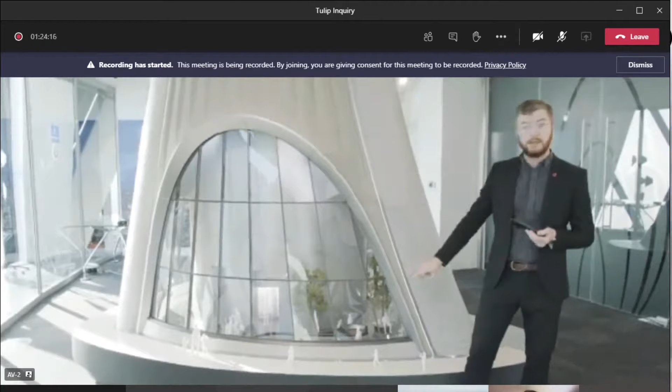We've expressed these pins all the way up the building and all the way up the fluting as well, as you can see in the troughs that go up the flutes. Looking at this side of the model, you can see that there is a different detail where we've integrated hostile vehicle mitigation into the glazing in order to reduce the amount of bollards that we've had to use on the plaza.

Looking onto the interior of the model again, you can see we have brushed aluminium panels. This is to make the space feel as light and bright as possible, reducing the presence of the core in the space. There is an open lift car, which you can see, and it has a multimedia show in it that will be able to be played while you go up and ascend the building.

These lifts are double-decker lifts, meaning that there are 2 lifts stacked on top of one another. So in the place of 4 lift shafts, we're able to fit 8 lifts to give us as compact a core as possible. We've got an edge trim on the building that clearly delineates the plaza from the building. And we've chosen 2 materials for the plaza itself, which is York stone and granite paving. To explore this further, we move to our next model, which is the 1 to 50 model.

So the model here has been cut close to the ground in order to give you a view of the whole site. Doing this lets you see the permeability of the buildings on the plaza. It shows the Gherkin in the center of the model. It shows the Tulip and the pavilion. To pick up the point about the paving materials, we are introducing a lot more York stone paving into the plaza. This is to make it feel like it's integrated and included in the city's urban realm.

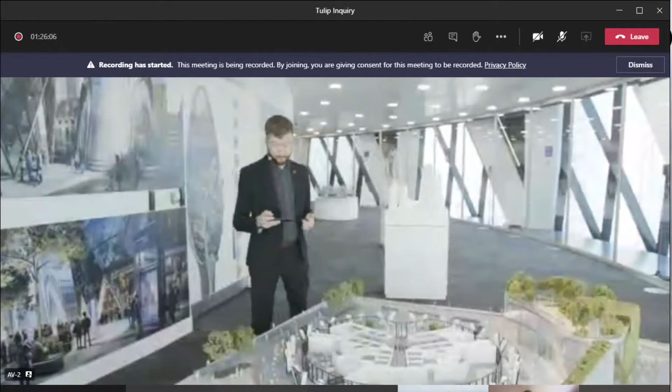The pocket park, which is located between the Tulip and the pavilion, integrates and diffuses between the York stone and the granite to act as a kind of buffer that mediates the relationship between them. There are concentric rings of granite benches which give a place to pause. The shape is not dissimilar to an amphitheatre. Vegetation and planting creates a softness that was not present in the plaza before. We've endeavoured to increase the vegetation across the whole site.

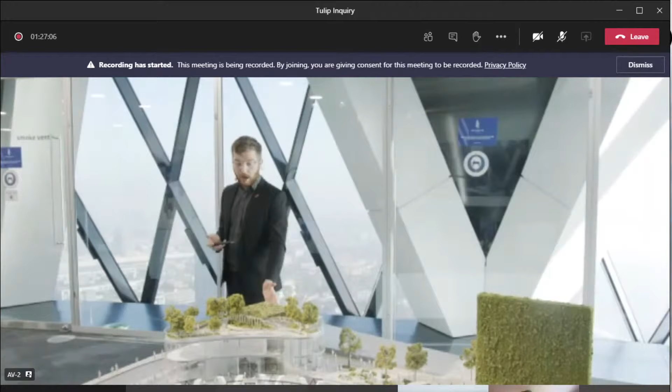We've introduced 2 lush new green walls at either end of Bury Court. The one by the Tulip conceals ductworks once housed in 20 Bury Street. The other one is on the side of the pavilion. The pair create a green gateway either side of Bury Court. This gateway at the St Mary Axe side reaches up and over and connects into the Rooftop Terrace, which is on top of the pavilion.

The Rooftop Terrace is connected to the rest of the public realm via a lift and stair. There are many raised plant beds, which are for shrubs, grasses, wildflowers and trees, along with lots of benches. On the first floor of the pavilion, there are offices, plant, and a mechanical automated cycle parking system, which is accessed off of Bury Court and the Pocket Park.

The ground floor of the pavilion houses new vehicle lifts, which allows us to get rid of the long service ramp that is currently on the site. On the ground floor of the pavilion is also the entrance to the visitor attraction and to the education and community space. The pavilion is connected via an underground basement mezzanine to the Tulip, where there are the banks of double-decker lifts which take people from the basement mezzanine up to the top of the building.

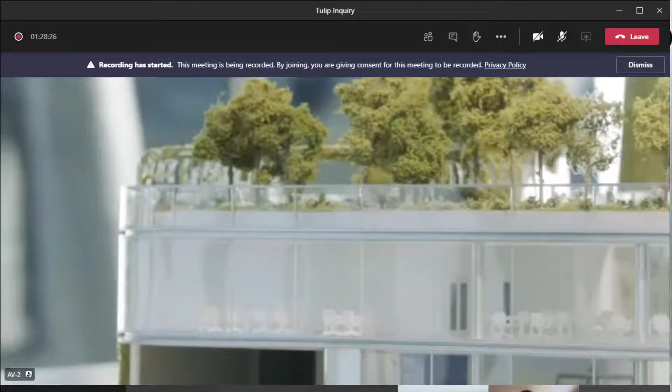I'd like to now move across to our next scale model, which explores the Tulip's relationship to the cluster slightly more. The model shows the consented schemes and the existing schemes. We have 100 Leadenhall, we have 1 Undershaft and 22 Bishopsgate. The relationship between the Tulip and the Gherkin is immediately apparent. They share a soft curvilinear form that communicates with one another.

At this scale, we get our first view of the whole of the building. You can see the flutes rising up the shaft, and you can see how the buttresses transition into the stem and become the frame that supports the windows at the top of the building. They also nest where the gondola tracks will be. There are 8 gondolas per frame and 24 in total. The top of the building is where the main accommodation of all the uses are. If we now move to our next model, we can explore the uses further.

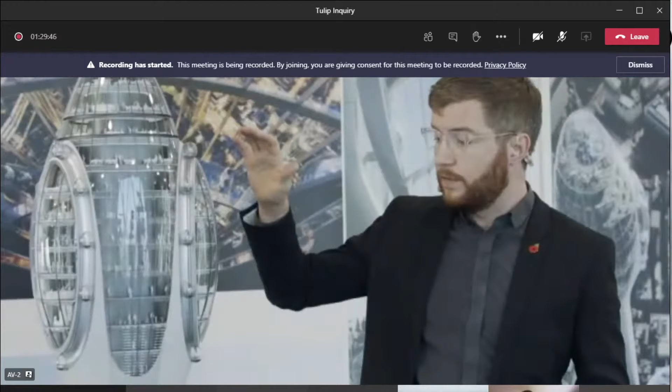This is the top of the building model. We've got a closer view at the different uses on all the floors, and we can see the form of the building articulated in a more detailed way. The top of the building is a domed structure where it's got the bar. It's similar to other domed structures that Foster and Partners have designed, such as the Reichstag and the dome at the Gherkin.

Level 10 is the building maintenance unit floor, where it contains the cleaning and maintenance equipment for the facade to ensure that it stays clean and well maintained. Also on level 10 is the kitchens that service the bars on the top levels and the restaurants as well.

On levels 8 to 9 are the restaurant levels. You can see there is a double height atrium that connects the 2 floors. And there's also, you get special spaces where the arches connect over the top of the windows.

Levels 4 to 7 are the main viewing galleries. They're connected by a quadruple height atrium with a sky bridge. This whole face looks down onto the top of the Gherkin, where there's a visual connection below. On the back of the building, we have slides and spiral staircases which connect the floors as well.

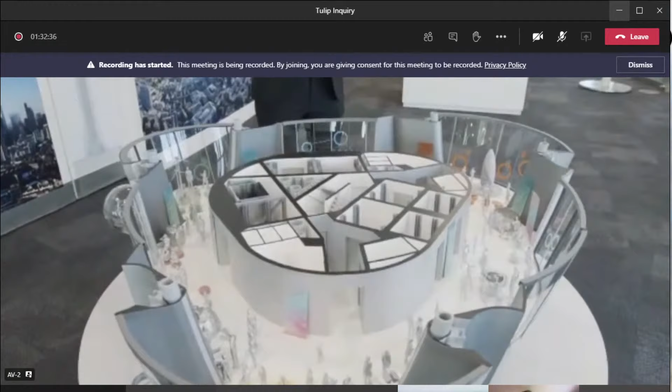Due to the scale of this model, you can get a better sense of the core. It runs through the building, servicing all the floors of the building. We have 3 banks of lifts, 2 banks of shuttle lifts, which take visitors to the top of the building. These are the double-decker ones that we previously mentioned, and 1 bank of local lifts, which allow for movement within the top of the building. There are fire stairs and fire lifts in the center as well.

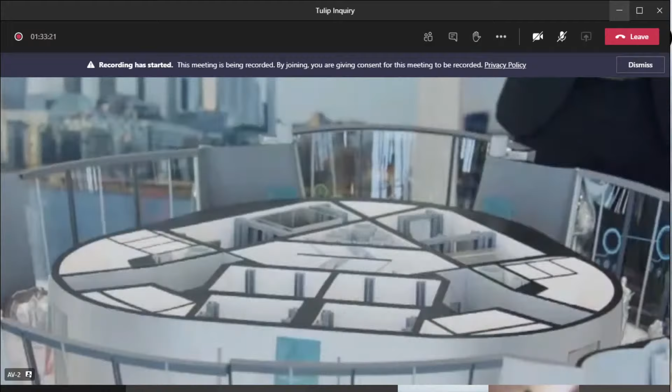We also get a slightly closer look at the gondolas. You can see how the mechanism and the structure is closely aligned and integrated. There are 2 hemispheres that make up a gondola. They are attached to a slew ring, which is gyroscopically stabilized and attached back to the track. We've explored the designs of these with an amusement ride maker, Intamin. There's space for 4 to 6 people to sit per cabin.

I'd like to give you a sense of the view that you'll be able to achieve at the top of the building, referring you back to this panoramic view taken from the site. In order to help you orientate yourself with our next model, I'd like to point out the Shard on this panorama and then draw your attention to the Shard on this model. This is a 1 to 1,500 model of a part of London. In the centre of the model, we have the eastern cluster showing existing and proposed schemes. You can see the Tulip here.

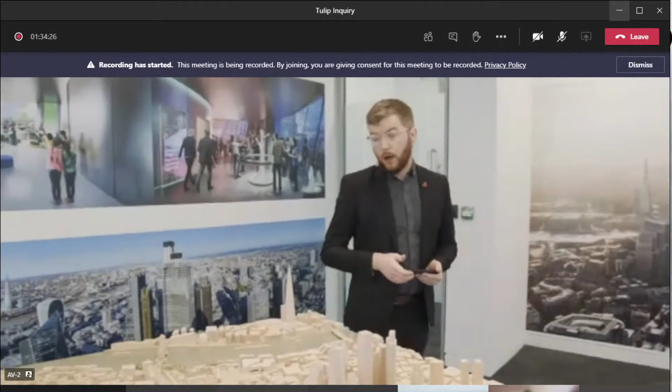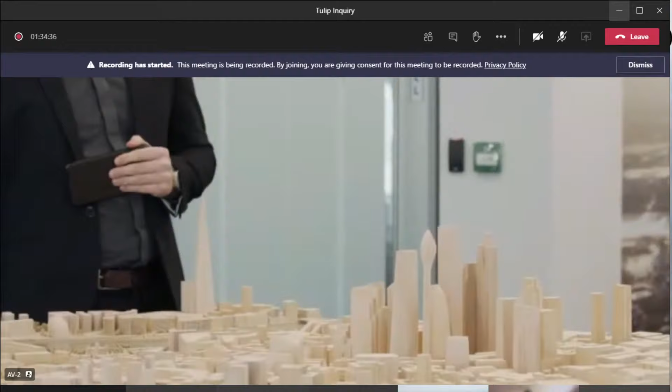Off to the east, we have the Tower of London, the World Heritage Site, and we have Tower Bridge on the Thames. Other key landmarks are City Hall, St. Katharine Docks, and the Royal Exchange. That concludes our tour of the models for now, and I'd like to now take the opportunity.

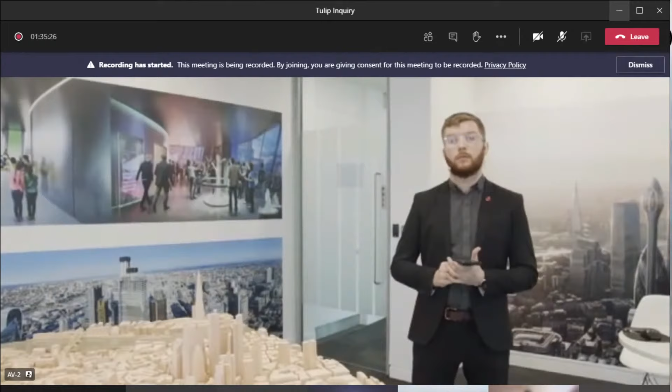Just before you do, Mr. Bush. Sure. So we had a little technical difficulty with one of the cameras there. Okay. And I'm going to ask that the relevant camera goes back in reverse order through the models so that you can get a 360 understanding of each of the models, going back from this wooden one right the way back to the first one. We don't need any commentary, I think, Mr. Bush. Right. Just if the inspector and the other advocates and the members of the public who are watching can look at the images and judge themselves.

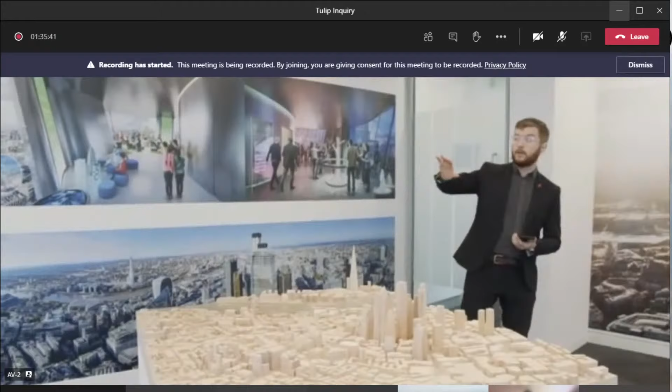Okay, I just need to tell the cameramen this, so they would like to have another look around the models again. If we could just slowly orbit around, going back from this one up the space, please. Do a 360. Can I just add, please? Can you hear me? Yes, I can, sir. Mr. Inspector. I didn't want to interrupt the presentation because I could see the flow of it. But yes, I very much want to see a slow move around this model.

And then I didn't catch as much of the education and gondolas model as I would like to have seen. So if that could be repeated slowly, please. We'll take as much time as you like on that. So as I say, there was a separate camera that was to do that job, and for one reason or another, it failed. So we're going to do this. So my instruction to Mr. Bush is that we should take as much time as is possible to go round these models. Thank you. Sure. Thank you.

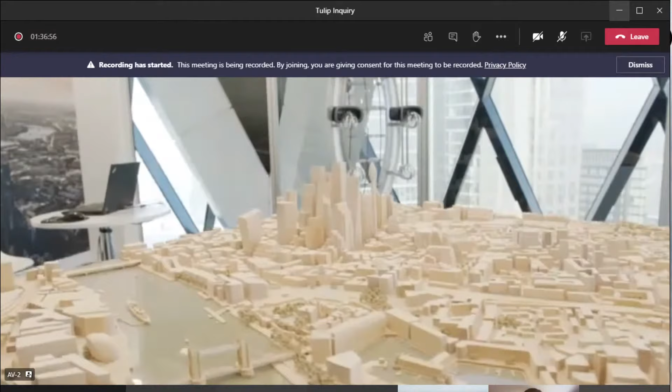Yeah. Can you just slow it down a bit, please, and just go very, very slowly round. Thank you. Morning, so it's Mr. Watson here of Taylor Wessing. I'm here with the crew and obviously with Mr. Bush. I suggest that when you and others have had the time to consider each model, then we'll move on. So we'll do it under your direction. Okay. Thank you. If you could stop there and then go slowly back round again the other way. Perhaps at a slightly lower level. Yeah, that's about perfect. Thank you.

That's great. Thank you. And so if you don't mind, I am going to ask that we go in the opposite direction, back round one more time. Yeah, no problem. Thank you. Right, towards me, guys. So can I ask through you, is that sufficient? And do any of the other advocates want any other views? That's fine for me. Thank you very much.

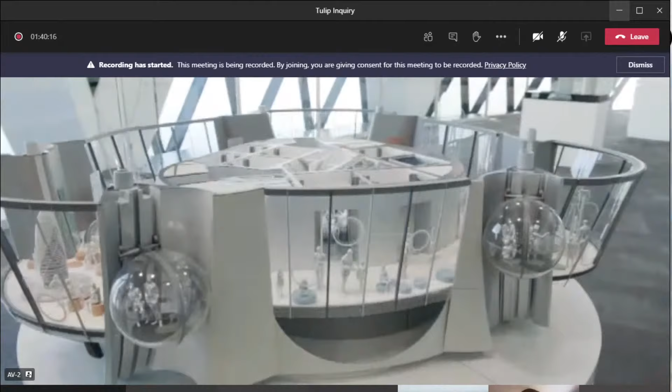So I'm not sure if you were able to see the gondolas when I was describing them, but we have here the two hemispheres of transparent material that are attached to the slew ring, which is a gyroscopically stabilized mechanism, and it attaches back to the structure of the building on a mechanical rail, which is not dissimilar to a roller coaster track. And we've got space for 6 to 8 people in these gondolas, with benches for people to sit during their ride as well.

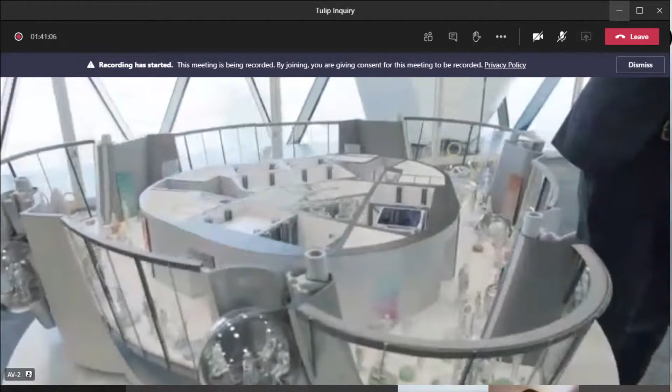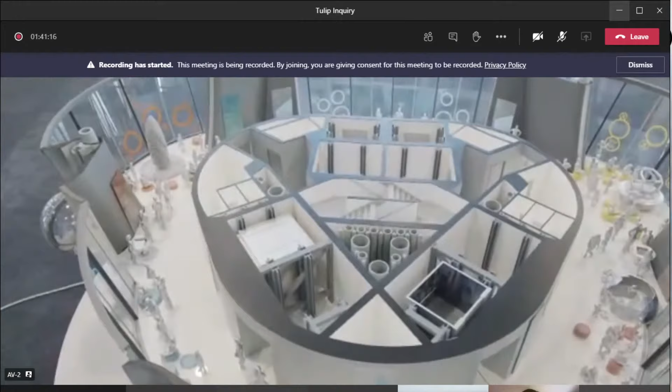Thank you. Can we then do the same? Sorry, sir. I was just going to say, with the camera focused on the model, could you just talk me through the core and the other spaces within that floor, please? Of course. So we have 2 banks of shuttle lifts. So these are the lifts which take visitors from the entrance in the pavilion, in the basement mezzanine, to this floor. These are the double-decker lifts here and here, 4 different carriages of them.

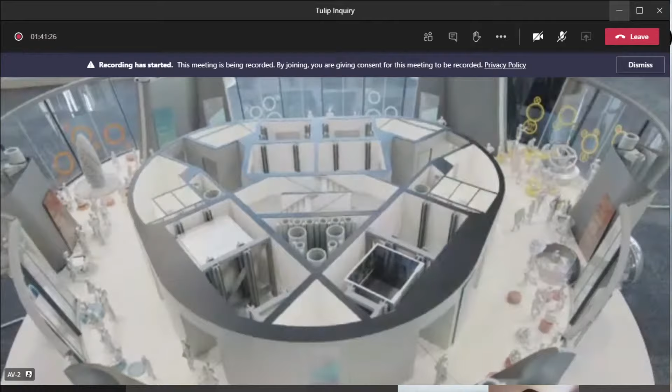Can you just explain the double-decker lifts to me? Are these simply joined together and they go up and down together? Yes, that's the case. Okay. So they load from the basement mezzanine and from the ground floor simultaneously, and then come up to the top of the building and unload from 2 floors simultaneously as well. And it ensures that we can get as many people up the building as possible. Yeah, I understand now. Thank you.

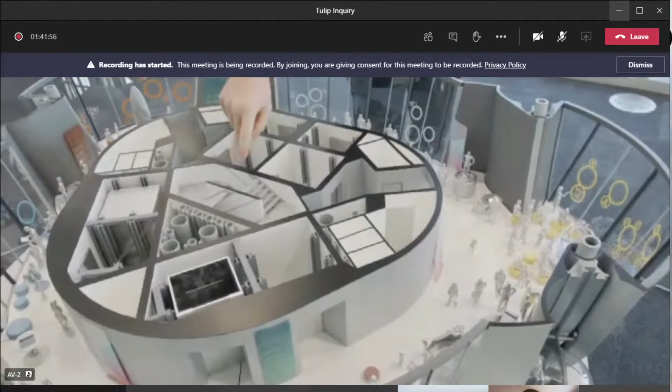Welcome. We've also got the fire stairs, which are a double scissor stair, which run the length of the building all the way down to ground to ensure that people can evacuate. We've also got the fire and goods lifts, which are dual purpose lifts, which are located here. And these banks here are the local lifts, which run just between levels 3 and 11 of the building. Right. We've got ductwork and the 2 toilets and disabled toilets in this core as well.

And then the layout that you're showing at the moment for the education and community facility, talk me through how that's arranged. So it's arranged in an open plan way that it's expected that people would circulate around, viewing each window at a time, and there would be curated exhibits and activities to do at each of the windows, which correspond to the views out and the national and London curriculum.

Thank you. And if this is for Mr. Harrison rather than yourself, then say so. But if it were divided into classrooms as shown on the latest drawing, quite how would the partitions go? I think that's a question for Mr. Harrison. That's fine. He's now got some warning of the question. Exactly. Okay.

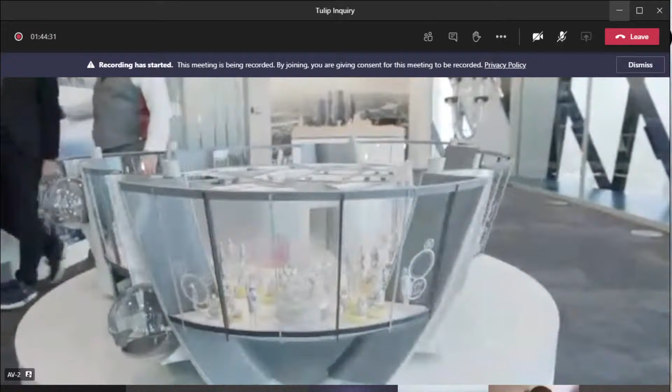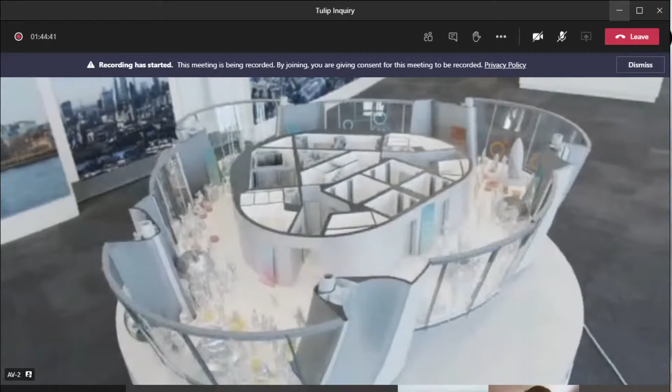Do you have any further questions of this model, Mr. Inspector? No, but if the camera could just do a 360 slowly round it, please. Mr. Bush, could it do a 360 at various levels, please, at the level of the gondolas and from above? Of course. So we've done one circuit there, and I'm going to suggest that we do another circuit from above, sir. Okay. Thank you. Right, that's from above then. Thank you.

Thank you. That's excellent. You content we move on? Yeah, I'm happy with that. Thank you. Next model, please. Next model then, going down. So the next model, if we go along, will be the 1 to 100 model of the top of the building that shows the different uses and the form of the building in slightly more detail.

Are there any questions specifically about this? I don't think so, but it's good to look at it again. Can you spend some time on this, because we didn't see much of this. We saw more of Mr. Bush last time because the second camera wasn't working. Thank you, Mr. Harris. Yes, we'll spend more time on this model from different angles, from the top to the mid to the bottom. We'll do that now.

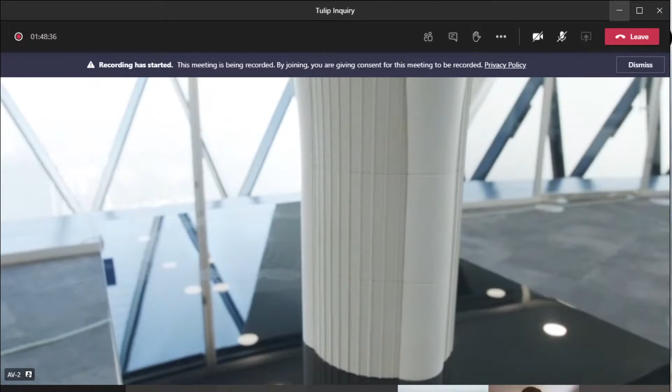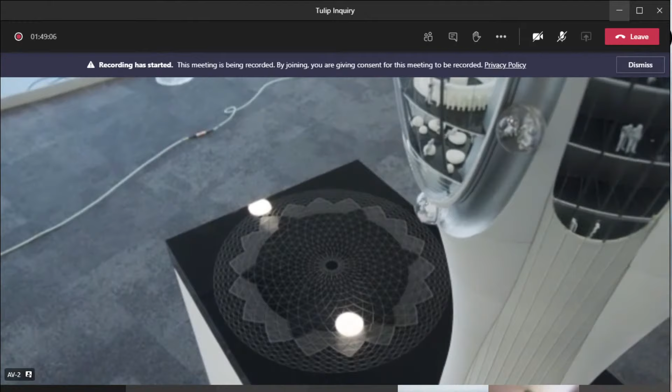Can we go down, please, and look at the stem, and the plinth of this model is interesting as well. Certainly. So we'll take it down towards the stem now, and then over to the plinth, which has the illustration of the top of the building of 30 St Mary Axe, the Gherkin. Can we go around that model one more time then, please? Certainly, we'll go around that model one more time. Thank you. There's the sky bridge on the wall in the background, sir. Ah, yes.

Yes, thank you. Just on that note, Mr. Harris, that sky bridge image is one of the 360 nodes that we'll turn to. If you would like to view the interior wall with the array of visual images, all of which are from Mr. Harrison's evidence, we can do the camera run on that as well. Well, I think we need to do that for the members of the public who won't otherwise see it. Certainly. I suggest then we'll do the model run to the end, and then we will track from the bottom up to show the visual array down the wall, and end at the top with the presentation from Mr. Bush of the 360 nodes. Thank you.

Again, sir, through you, can I ask, is that sufficient for this model? I've got a very clear understanding of that. Thank you. Grateful. Next model, please, then. Thank you, sir. Thank you, Mr. Harris. We'll move on to the next model then.

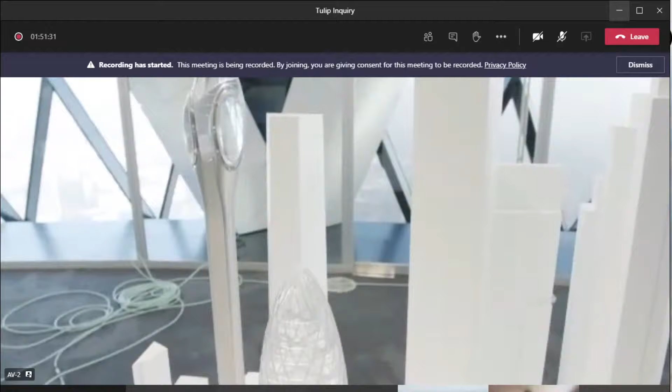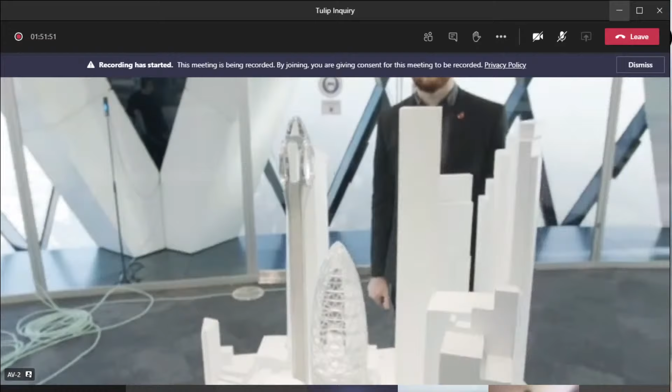Mr. Bush, just for orientation, would you just pick out the other buildings in that contextual model, please, whilst the camera's working the views? Of course. So in the center, we have the... Just pause a second, because we need to come out if we're going to identify the individual buildings. Okay. Just come back out and back out a little further. There we are. All right.

So we have the consented 100 Leadenhall scheme on this side. This is number 1 Undershaft. Yes, 1 Undershaft, Eric Parry. We've got the Cheesegrater by Rogers Stirk Harbour and Partners. And we've got 22 Bishopsgate by PLP Architecture. We've got 100 Bishopsgate by Allies and Morrison. And we've got Heron Tower by KPF.

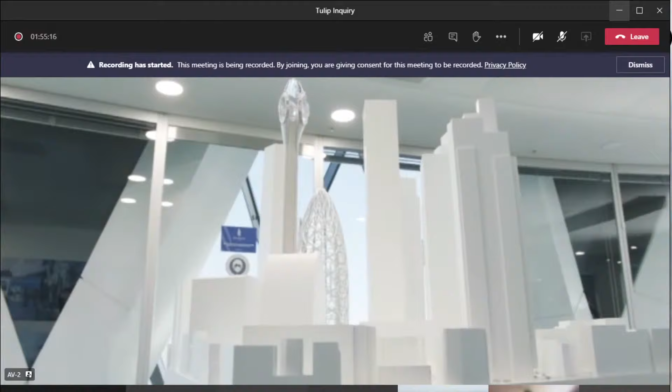Have we seen enough of this model, or shall we move on to our 1 to 50 model of the plaza? That's very helpful, but I wonder, could we do one more circuit, please, at a low level? At low level, so one more circuit, yes. Thank you. Sort of looking up towards the, I don't know how low the camera person can get. Well, we're going to give it a go, sir. We're dropping the steady cam now. We're looking up through the buildings. Thank you. That's great. Thank you, sir.

We'll now move to the 1 to 50 model that shows the public realm and the buildings cut at low level. And again, it would be helpful here if we had the 360 from above, and then also from low. Understood. And Mr. Bush, you were telling me about the way that the building would be integrated to the ground, and I'm not sure I absolutely followed every nuance of that. Could you just run me through it again, please? Of course. I feel like it might be better explained on the larger model at 1 to 10. Oh, okay. Well, we'll wait till that one. Thank you.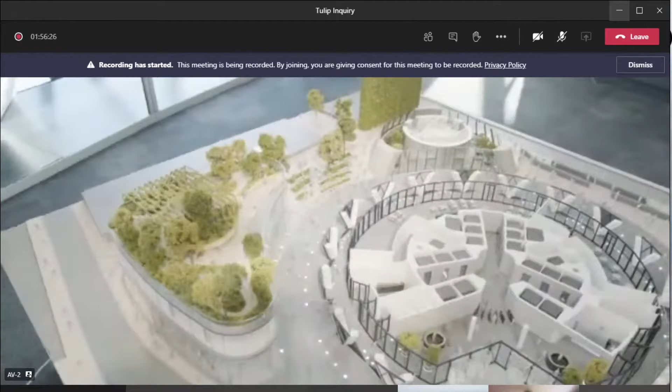Mr. Bush, the roof, the public realm on the top of the building that's the pavilion is removable, isn't it? It is, Mr. Harris, yes. Would you like me to remove it? It helps with seeing the permeability through the building.

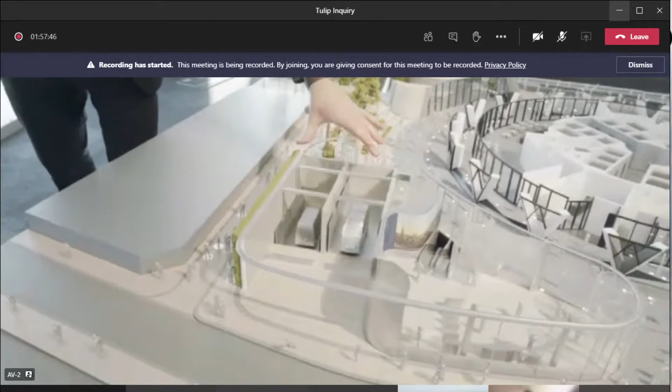And for the inspector, could you identify approximately the position of the present ramp, please? Of course, Mr. Harris. So they are both aligned pretty much with the vehicle lifts which we're showing here. So there is a ramped corridor which runs pretty much to this line here. So it's all of this space up to St. Mary Axe. Thank you. I remember that. Grateful, sir. Could you focus in on the pocket park as well for me a little, please? Thank you.

Should we do one more rotation of this model and then move on to the 1 to 10? Please, can we focus in on just the base of the tulip for a moment. Of course. Thank you.

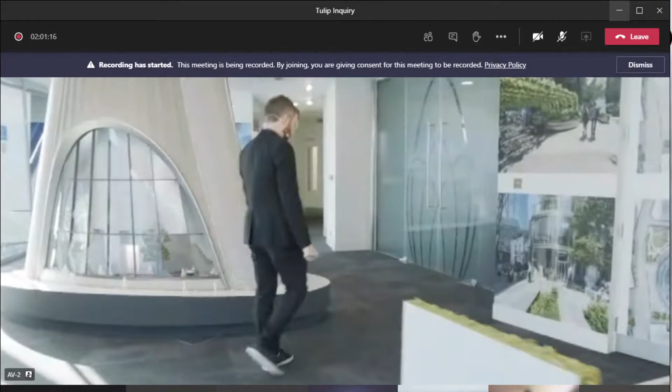And Mr. Bush, when you were explaining the nature of the pins and the flutes, we need to do that again, but with the close-up camera, because the pins and the detail weren't as apparent as they should have been last time. Of course. So the buttress is this large sweeping element here, and you can see that there are joint lines at 4.5 meter intervals, and this is the section that they'll be making each lift of the concrete in. The concrete formwork is going to be held together by bolts that tie both plates together, and you can see that we've articulated these and they're all aligned up the building as an honest expression of how the building comes together.

They're also present on the stem, which is where the fluting occurs, and you've got the bolt holes in the troughs of every other flute running up the building. And those would all be prefabricated off-site and brought along, is that right? The buttresses are in situ concrete. Oh, okay. And the stem, sorry, at this level would be prefabricated, but the main mast is all in situ. Right.

Mr. Bush, can you orientate the inspector in the sense of explaining where we are in terms of the relationship to the Gherkin and to Bury Street and to St Mary Axe, please? Of course. So this is the inner face here on the concave face. This is where we are adjacent to the Gherkin. So the Gherkin's mostly off the model, with the Gherkin being positioned further away.

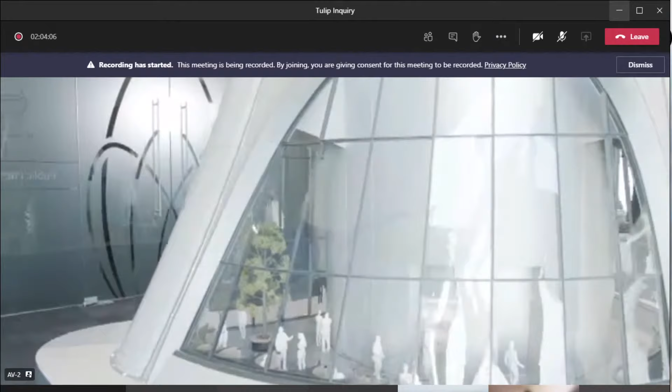Thank you. Can we go to the concave? Yes, I'm just going to walk you around the reverse direction. So here we have the concave face. So this would be the new, just pause there, the new curved street created within the site. And I'm looking out through and seeing a tree, and I'm looking out into Bury Street there. Is that right? That is correct. You're looking out through to Bury Street. Good. All right. So that will feature in this afternoon's evidence, so I wanted you to have that view here. Thank you for that.

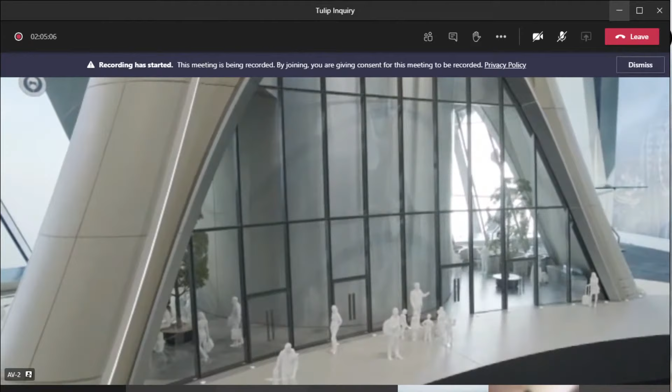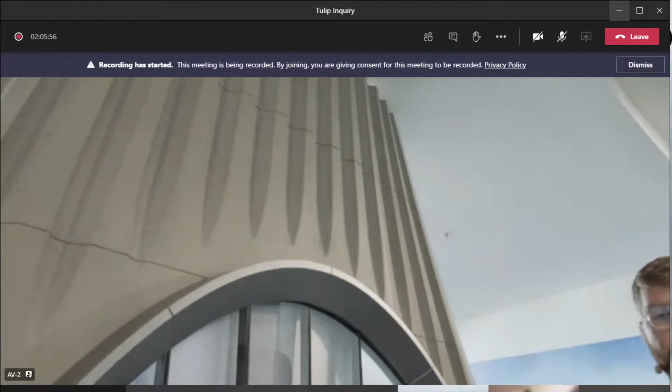Can we pan up, please? Could you do me a favour, please, Mr. Bush? Could you put your hand into the frame? It's a 3D thing, and could you run your hand over the flutes, just so the inspector can get a feel for the nature, extent, and depth? The flutes are here and they're scalloped to articulate the surface. They serve a function towards the top of the building to help shed wind, to stop oscillation and reduce loading. They're similar in form to those found on classical columns. And again, we'll hear about that this afternoon.

Good, so are you content with that? I am, yeah. I've got a very clear picture of that now. Thank you. I'm grateful. So two things. The first thing is, because of the inherent instability in Teams and the number of people who are on, the quality of the images that you're seeing is not as sharp as the quality of the images we are producing. So the entire thing has been recorded, and we've recorded it here too, exactly as is, and we can make that video recording at the much higher resolution available to you, and indeed to anybody else who wants to see it. Thank you. I was going to ask for that anyway, because I think it should be available for the Secretary of State. Perfect, sir. We'll make it available on a stick, so that it could be sent off with your report and the other documentation that the Secretary of State might need.

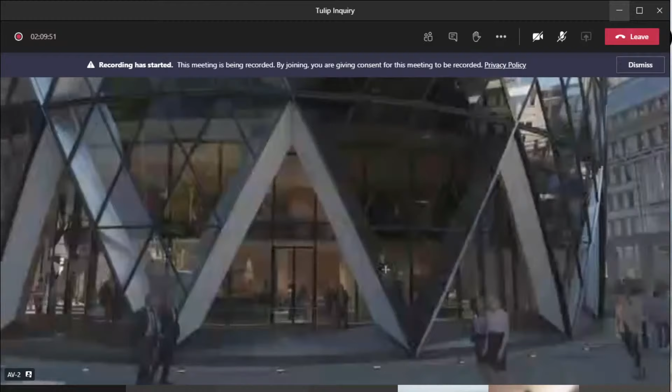Right. Let's see if this bit of the technology works. Great. Okay, I'm now sitting at my laptop. Are you able to see my screen, Mr. Inspector? Yes, I am. Great. Okay, so you join me here at the Pocket Park.

So this is a 360 node. So we can look in all 360 degrees of vision. So we can look up and see how the Tulip sits in relationship to its neighbours and the Gherkin. And you can see it next to Bevis Marks, 6 to 8 Bevis Marks next door to it.

We've got the newly designed Pocket Park with its concentric granite and York stone paving. And we've got the rehoused memorial to the victims of the IRA bomb set in with a water feature. We've got views opened to 30 St Mary Axe, the Baltic Exchange building.

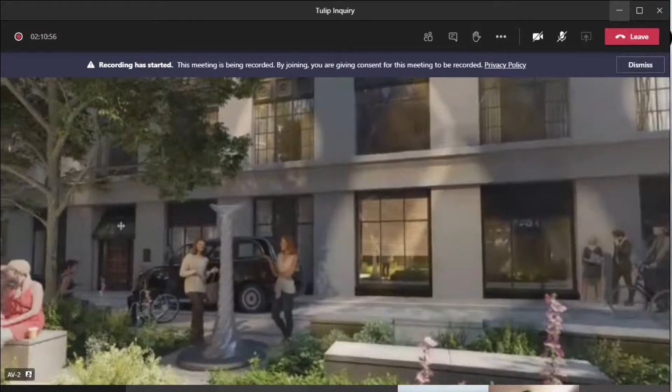As I pan round, the pavilion comes into view, and you're able to see the access routes up to the pavilion rooftop. So we have the stairs and we've got a publicly available lift. There's also the 3 cycle parking loading stations located in this location as well.

Is there anything else you would like to look at specifically at this level before I move on to the roof terrace? I'm quite happy for you to move on. I have looked at them and I'll look at them again, but I agree it would be helpful for the public who are watching in. Sure. I will move now to the roof terrace.

So this is the roof terrace on top of the pavilion level. Here is the pergola that I mentioned previously, which connects via the green wall to the roof terrace, which creates a sense of enclosure and allows for trailing and climbing plants. We've got our raised plant beds, which have shrubs, grasses and wildflowers, and a various array of benches. There's new perspectives on the surrounding buildings that you're able to see and appreciate from this elevated viewpoint.

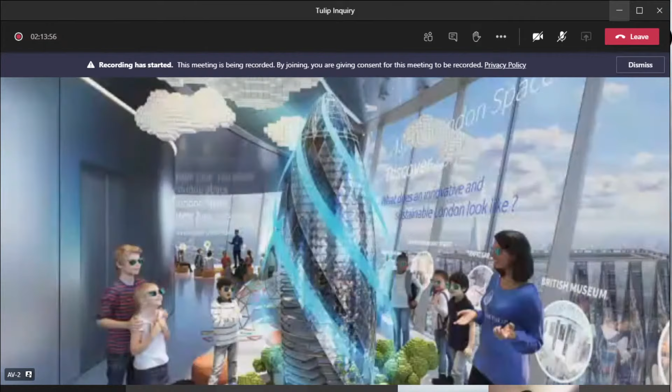We now go up via the lift. This is level 3 of the Tulip. We're in the educational and community space activity zone. This is in the education mode. There's a model of the Gherkin, and there's a sustainable lesson plan in full flow. We can see Eric Parry's One Undershaft from the view.

22 Bishopsgate. Sorry, sir, can I just ask if all of the consented schemes have been added into this image? I believe so. We have 100 Leadenhall over here. There may be some more recent ones that have been granted in the last month or two that may not have been present in this image, but we've endeavoured to include all the consented ones at the time this image was made.

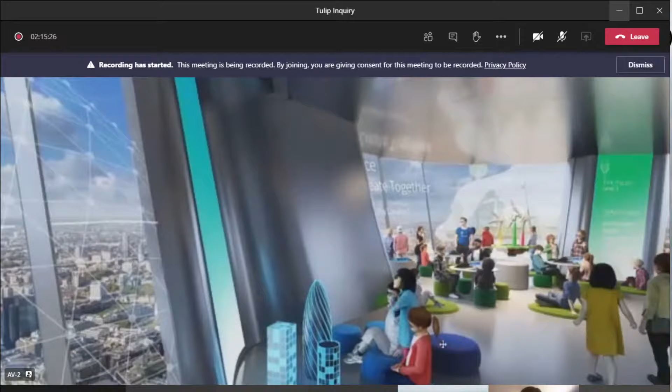If my learned friend has one in mind, offline, let us know and we can confirm or not. Yes, we do. I just want to check the height of 100 Leadenhall. Thank you. We'll check on that. Yeah.

I'm now going to move into the next 360 node. This shows the community mode of level 3 and a nighttime event. Do you just want to explain what those panels are that we see in the image there, please? Of course, this is the glazed facade of the building, which has interactive displays and technologies embedded within it, which will allow for an enhanced and augmented view out here. So this, I think, has been set up as if it is a community outreach session where they are teaching communities about scripting and coding.

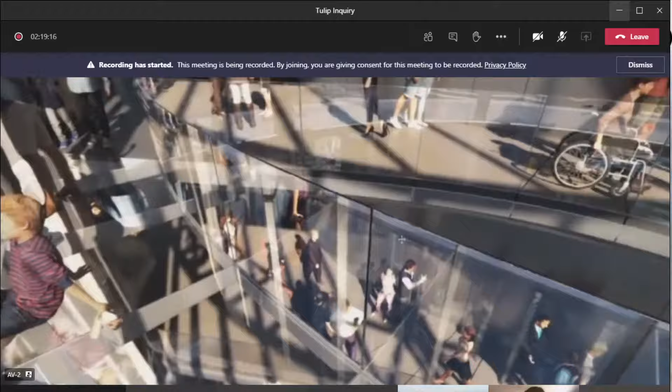And for Mr. Linus, could you please pan back round to 100 Leadenhall Street? Of course. There we are. Thank you.

Now we're going to take a VR node, a 360 node from inside one of the gondolas. So here we are now outside of the main envelope of the building. In the gondola pod.

Can we just for my sake pan back to what's now called Tower 42, Seifert Tower? Of course. And there we are. And so you can see, as I said in my opening, that context was everything in those days. That is just an extruded form of the NatWest logo.

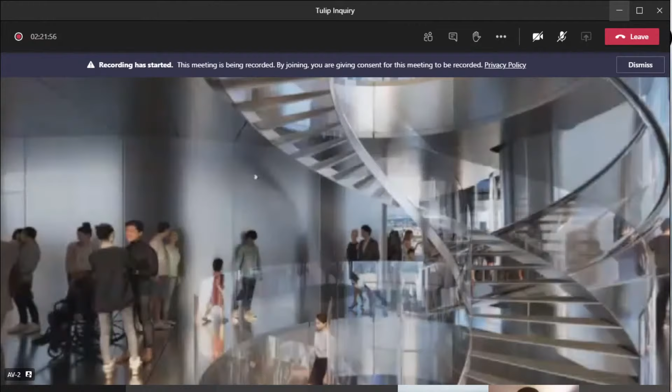Our next view will take us to the spiral stair and slide at the rear of the floor plate, connecting the 4 levels. From this part of the building, we're looking more easterly. You can see Stratford with the Olympic Park and Canary Wharf.

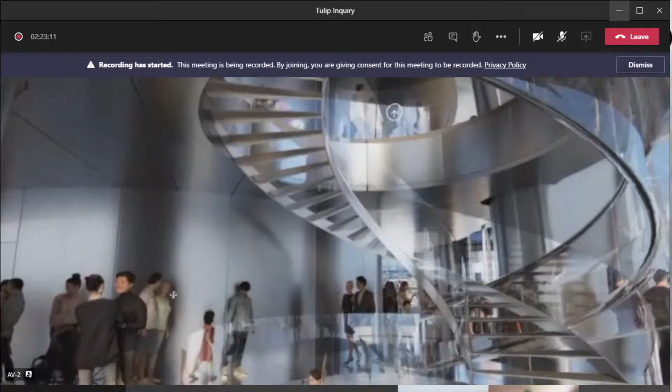We also have a view of the Tower of London and Tower Bridge, with City Hall in the background. Taking the stairs up to level 7, we're now on one of the balconies in the atrium, where, because the floor plates are scooped back, you can see down to a great degree.

That is the sky bridge there below us, with the Gherkin as well.

Our next node is in the skybar on level 11. We're positioned in front of the feature stair, which will take visitors up to the tallest, highest level within the dome space.

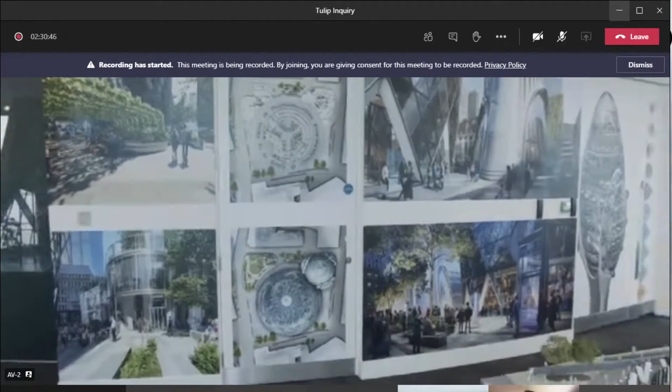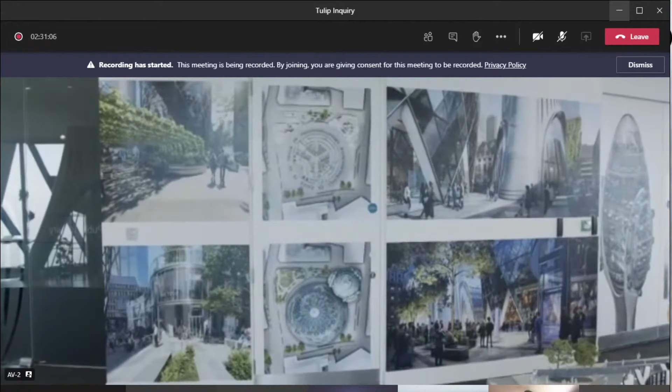That concludes the visual material that's presented on the walls. Thank you very much, sir. And that is the end of the session, as well as we could present it. So we are able to set up similar sessions later in the inquiry should you need refreshing on anything. But we'd need a little notice in order to get the cameras sorted, etc.

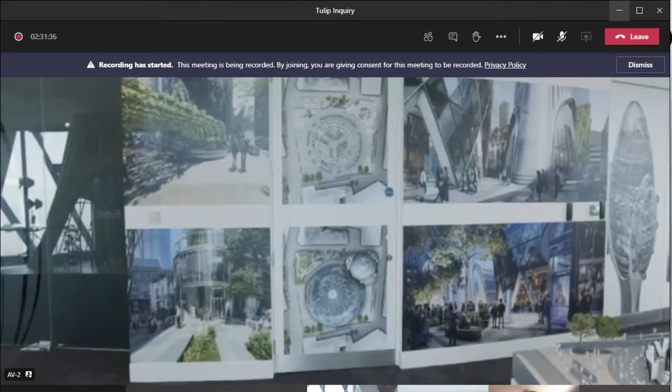So if you do think there's anything you need to see further during the course of the inquiry, please do let us know. I shall do that. If it's possible to have the recordings and the clips of the recordings available before we break in week 3, then that would allow me to double check that they cover everything that I think should be covered. So that would be helpful, please. We'll do that. And there are 2 other things that are relevant to this session.

The first is you have had the opportunity of the goggles and the immersive experience that goes with that, and you'll be able to note and judge the difference between that and seeing it on a video. Both my learned friends quite rightly asked that they be provided with the goggles too, and they were. We take the view that the nature and extent of that experience is such that the Secretary of State and his officials should be furnished with this information, but also with the goggles.

And yes, we'd be minded to do that unless you thought it inappropriate. But we don't see how it can be in all of the circumstances. So I don't have a problem, but I'll wait to hear from the other parties. But I'm quite content to, I wasn't planning to keep the goggles. I'm quite content to pass them on to the Secretary of State and his team to use.

I'm grateful, sir. And the second thing is we are with the other parties putting together, as you've asked us, the route for the site visit. And mostly, of course, it's uncontroversial and will be outdoors. But there is also the potential for you to visit the Gherkin, obviously, to come and see the models, but also to see the rooftop bar and restaurant here. And we would like you to do that if it is at all safe to do that, unless you tell us you've been there and you don't need to do that.

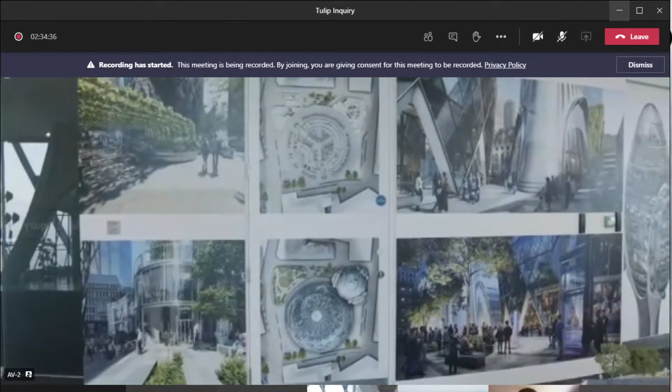Mr. Linus? Yes, sir. Sorry, just to confirm, in case we need to pick this up later with Mr. Harris's team, just checking on the figures, as we understand it, the height of level 3 is 255 AOD. And we just want to double check, there may not be an issue at all, how that relates to the height of 100 Leadenhall that's shown in one of those images. I think I gave a figure of 240 for level 3. It's a bit higher than that. It's 255. But we'll check that offline. If there's anything further to say, we'll come back to you, sir.

Okay, but while we're here, could we just pop back to that image, please? It was the first of the images, I think, from level 3, looking towards 100 Leadenhall Street. So if we can refresh our recollection of what that shows, and then the rest of this discussion can be dealt with in the usual way in cross-examination. Thank you, sir. Mr. Bush is now back at his laptop, so if we haven't already, the AV crew will make the switch onto the laptop. Yes, at least I see that. Okay. It's there.

Okay. And so we'll pass a note to HE in relation to that, and from the animators to confirm the position. Yes, sir. It's just a double check point, sir. Thank you. I understand. The interesting thing about all of these heights is that they're all taken from the tarmac at Heathrow Airport for some reason, and City Airport for some reason. But perhaps we can explain that in Mr. Harrison's evidence.

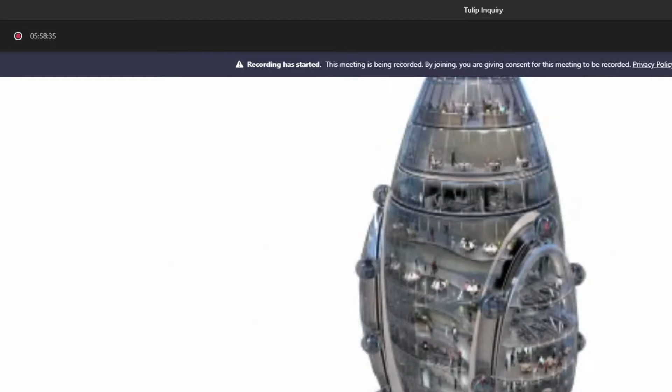The panoramic scenery at all levels is unrivaled, and with 410 linear meters of perimeter, every visitor will be able to stand and admire the view without having to wait or peer over someone else's shoulder. The sky bridge at the arrival floor of level 6 is a key part of the visitor journey.

A transparent walkway spanning across the 4-story void of the atrium, the experience places guests on the very edge of the building's facade, 255 meters above the streets below.

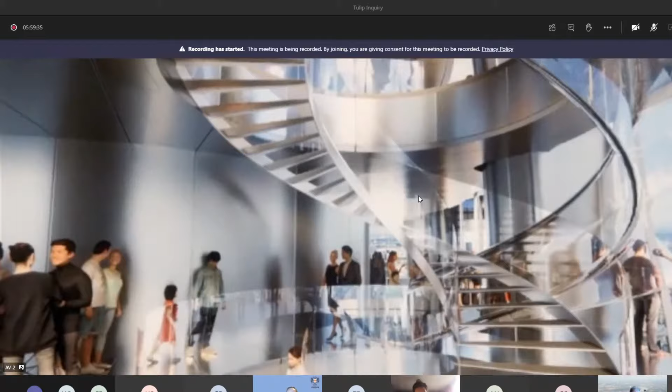The spiral stair with its reciprocal slide lets visitors move between the 4 floors. The transparent slide adds an extra level of enjoyment to the gallery. It is designed to be a more playful part of the experience for children and adults alike.

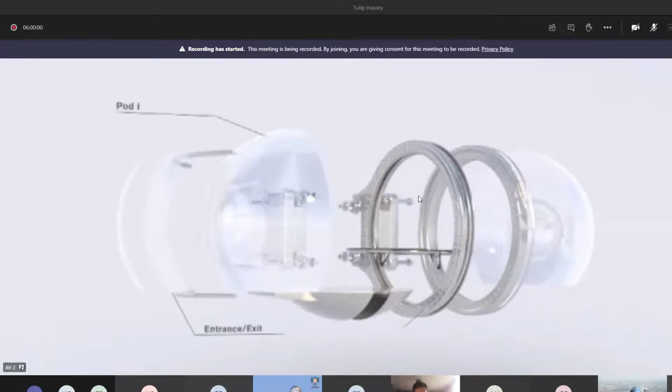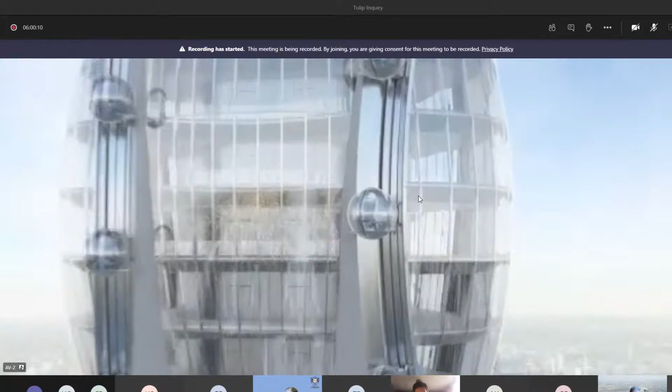The gondolas are without doubt the most spectacular feature of the whole of the Tulip. They give visitors a truly unique opportunity, an out-of-building experience, something they will never have been on before. A slow-motion roller coaster in a spherical glass cabin connected to the exterior of the building. The journey around each loop takes approximately 7 minutes, allowing time to appreciate the extraordinary scenery.

The curated visitor experience will be far more than just a view from an elevated platform. With its very particular location just back from the Thames, and with views to 3 prominent bends in the river, the unique form of the building takes complete advantage of more than 2,000 years of history, which will be brought to life through the use of innovative technology.

The education and community space is located on level 3. With an area the size of 6.5 secondary school classrooms, it sits 240 meters above the ground and has 360-degree views all around the floor plate, giving school children and local community groups a new social hub for learning, business, and the arts, supported by technology.

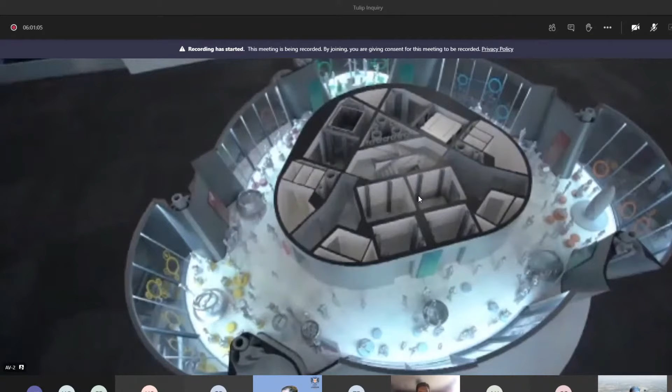The facility is a multifunctional space designed to be flexible and responsive to the varying needs of different year groups and uses by the community during the course of the day. It will open a window onto London's rich history and culture, and an opportunity to observe the innovations being developed for its future. The Tulip's educational outreach team will work with each school beforehand to prepare them for their visit, and also afterwards in order to develop continuity with the topics they have learned.

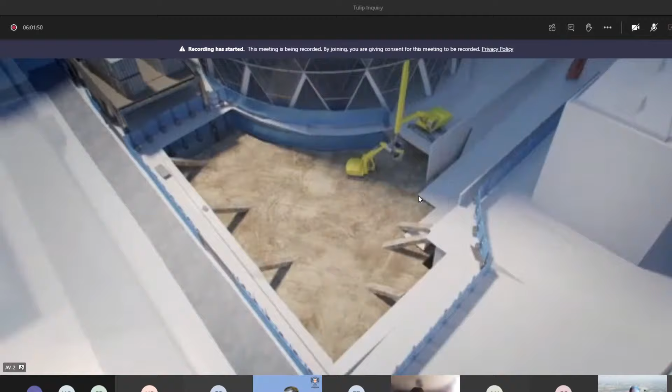We anticipate the building, if granted, would take up to 5 years to construct, and I would like to take you through that process now. After 20 Bury Street has been demolished, the site is cleared and excavated. Then piling rigs come in to drill a series of 55-metre deep boreholes for the primary foundation of the building.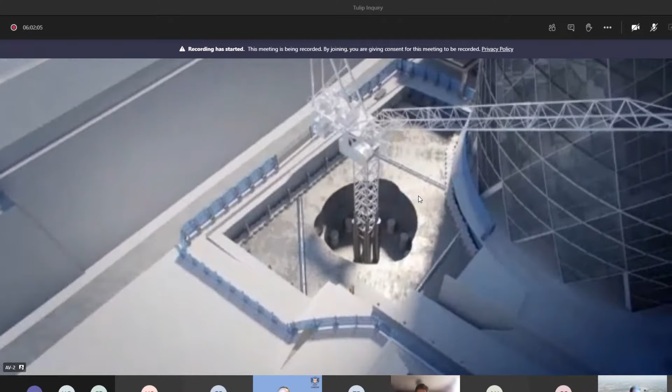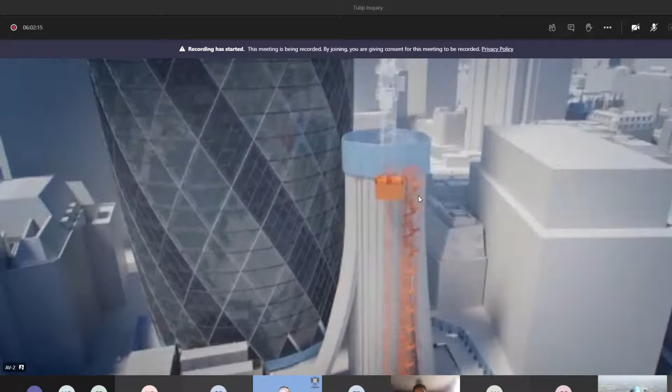Once the concrete pile cap has been cast and the basements completed, the jump form system for the core starts to rise. Stage by stage, on an approximately 5-day cycle, the stem rises into the air. Once it nears the top, the staging area for the top of building construction fans out, and from here on up, it is only the central portion of the core that continues.

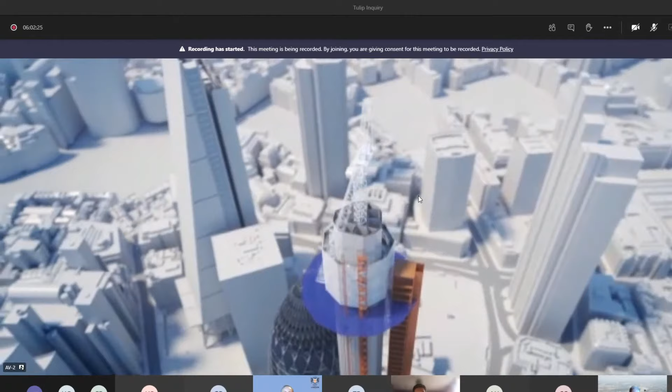The arches that support the exterior of the accommodation are constructed along with the perimeter beams. The floor framing spans between them and the core walls. Gantry cranes attached to the edge of the building allow the upper floors to be constructed. The mullion system for the glazing continues several floors below the top deck construction.

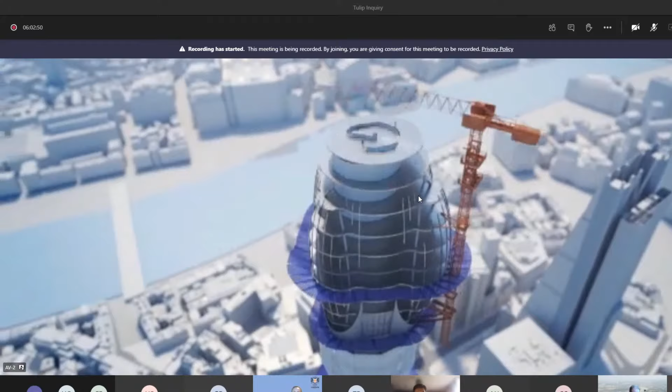Once the last floor has been built, a smaller spider crane is brought in to dismantle the 2 perimeter ones. The glass panels are installed, including the dome over the very top. Next, each of the spherical gondola cabins is hoisted into position and installed on the track mechanism concealed within the stainless steel loop, completing the external enclosure.

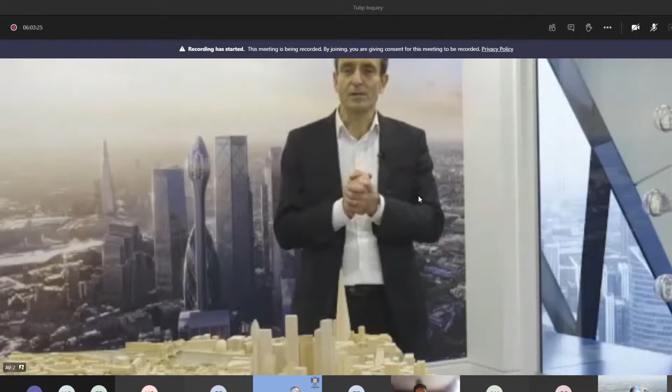In conclusion, Mr. Inspector, this is the most important building that Foster and Partners have done in years. It combines a sense of ambition with a spirit of innovation and technical achievement. It is a striking and, I believe, beautiful piece of architecture that provides a companion to a much-loved building on a windfall corner of the site.

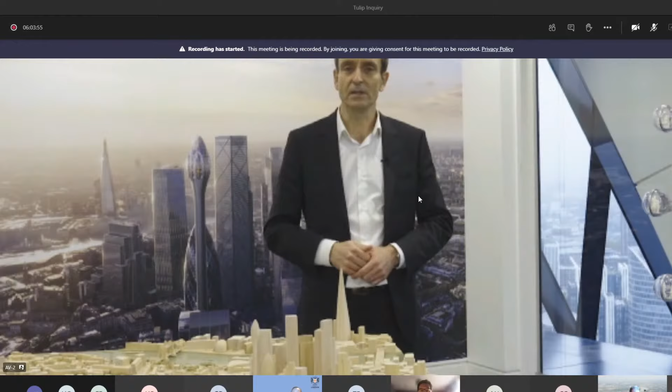It increases, enhances, and enriches the public realm, and it bestows a genuinely meaningful educational community benefit. It is a sign of confidence in London, a symbol of new growth, and I recommend this scheme to you. The final thing I want to show is a short movie that encapsulates all that I have been speaking about.